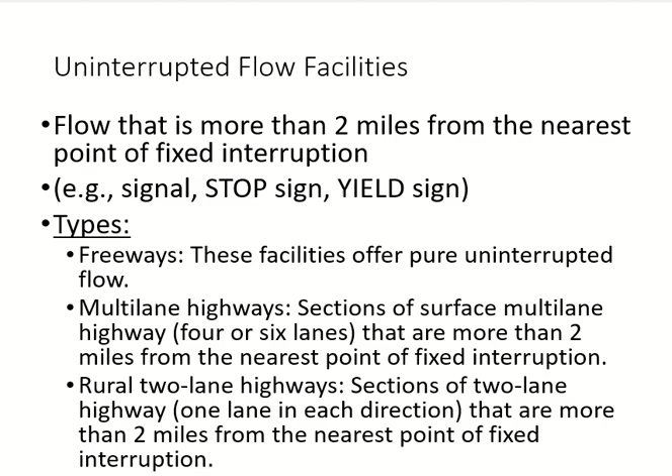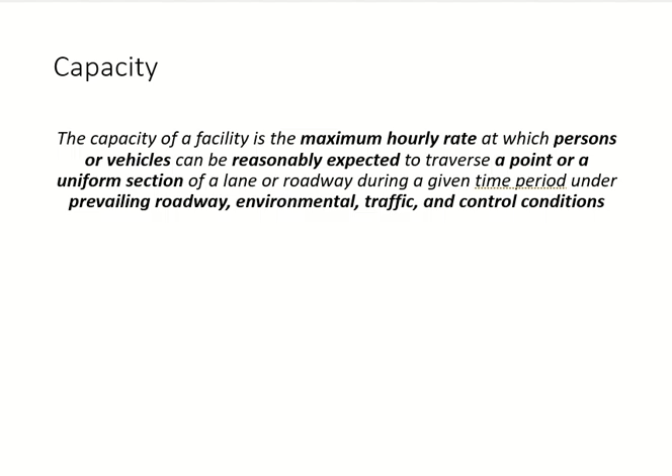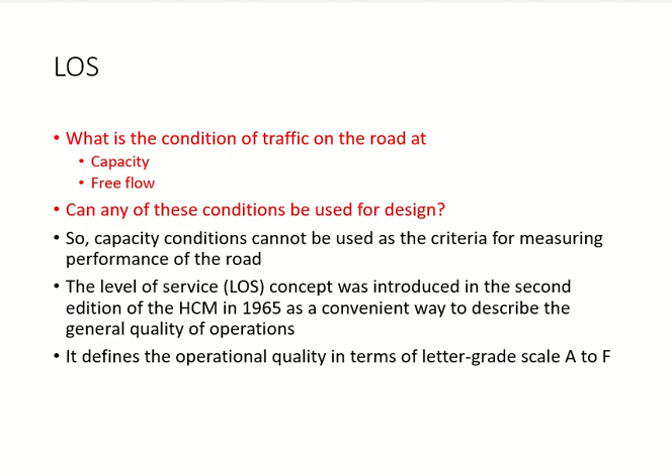Then the manual which we follow for this process, the definitions of capacity which is given by the manual, so it is more detailed, and it mentions what are the things which can change the capacity, ideal values of capacity, why do we need the concept of level of service, the definition of level of service, and the levels of service. Okay, so how many we have?

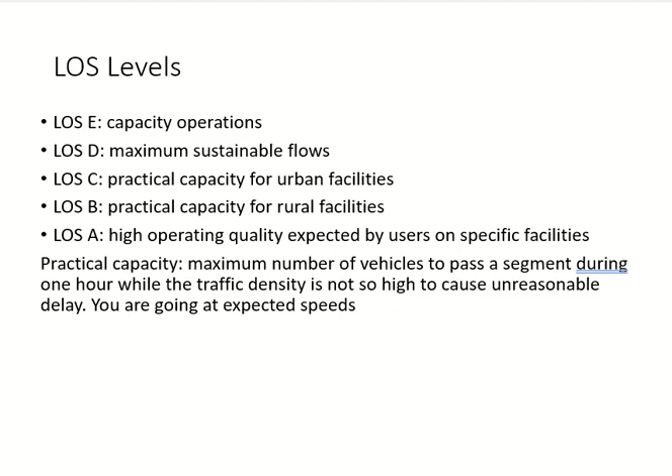5, because they are 5, right? We have 6, right? We have the 6th one, which I will give it to you, no problem. No F? Anyways. Okay, so today I'm going to start with this thing. So the level of service goes from A to F, right? Just like your grades. Sorry? No E. I thought no A. A, B, C, D, F.

Okay. But for example, if I say he got an A, I must have calculated that A using some number, right? Must have a number, and that number will tell me he should get an A, he should get an F, something like this, right? Okay, so that number is called a service measure. Service measure is a traffic parameter which tells you how much should be the level of service.

So in many cases we don't just assign it. We have to calculate something, and that thing will give us a level of service, and that thing is called a service measure. What we will study now, uninterrupted flow facilities, right? So for most of the uninterrupted flow facilities, we use density as our service measure. So if somebody asks me for a level of service for multi-lane highways or freeways, I will do it using density. To calculate level of service, I need density. Got it?

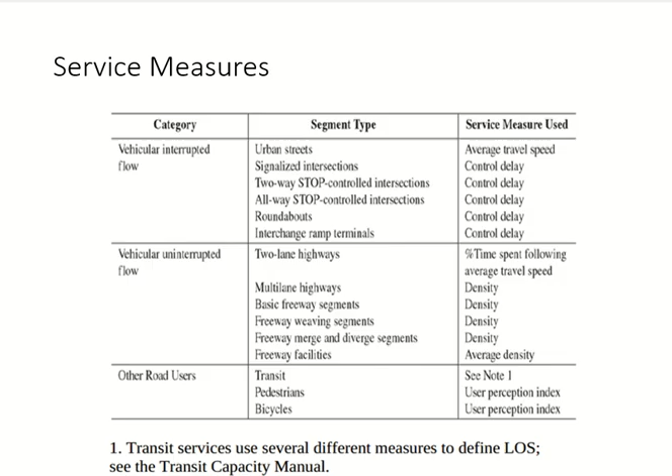Level of service changes according to traffic on the road. Agreed? So it goes from A to F. Traffic increases, where will the level of service go? If it is B, let's say. If traffic increases, will it go to A or C? C, right? Okay, this makes sense.

Now, traffic is a number, right? Traffic is a number, and level of service is a letter. So I need a value at which I will change the letter. Going back to the example of the grade. At what point do you go from A to A minus? 3.67. No, the number, the grade. Below 90?

Okay, so this is a number, right? There's a limit. Up to this limit, or more than this limit, it's all A, right? When you reach this limit, anything below that is A minus. Got it? Okay, so this limit for level of service is called the service flow rate. Service flow rate is the limit of traffic at which the level of service changes.

So at every level of service I have a range of flow rate. If you are within this range, your level of service will not change. When you get to the edge, it will change. For example, let's say the service flow rate for A is 1000. So from 0 to 1000, your level of service will not change. It will remain what? A. Now you cross 1000, it will start changing. Got it? So that limit of 1000 is what we call a service flow rate. Clear, everybody?

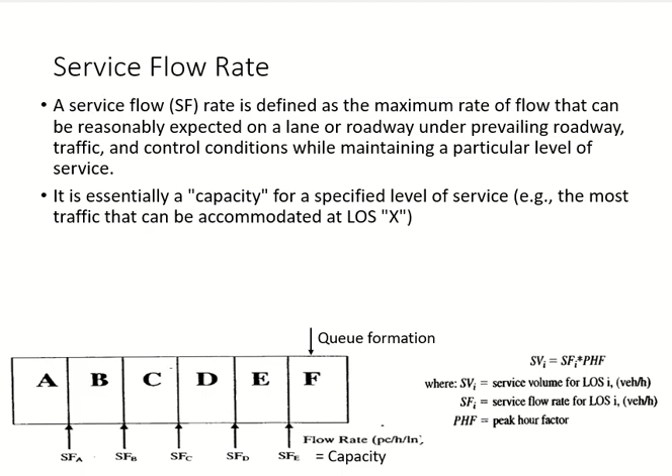In these slides, we will talk about 2 types of uninterrupted flow facilities, freeways and multi-lane highways. So we need to define them. Freeways are those highways which are purely uninterrupted. They do not have any intersections. In Bahrain, they call them motorways; the UK terminology is motorways. So a highway which has no intersections, basically. Another feature of a freeway is it always has a median. You will not find an undivided freeway.

Freeways always have more than 1 lane in each direction, so the total is always more than 2. So what are the 3 things I told you about freeways? There's always a median, more than 1 lane in each direction, and no intersection. No intersection means they don't have any at-grade intersection. There is another thing which we call interchanges. The ramps, the bridges and tunnels, they are there. They will not make the flow interrupted; it will remain uninterrupted.

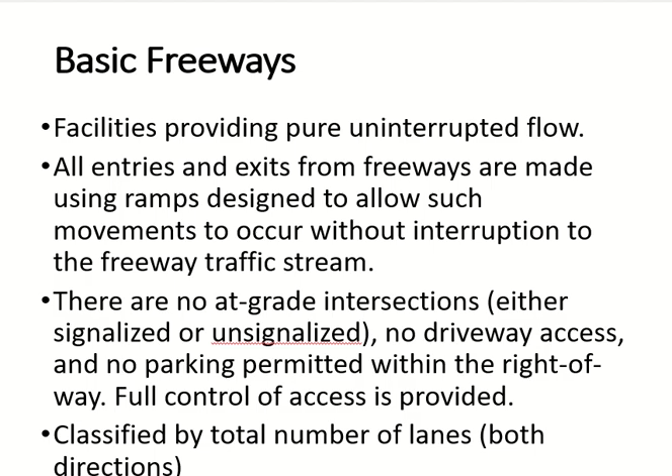So freeways, because they have so many parameters fixed, the only thing which makes most of the changes in the design is the number of lanes. So when you say freeway, you will tell me how many lanes you have. Then we have multi-lane highways. They are not purely uninterrupted, they have intersections. So there are parts of multi-lane highways which are uninterrupted. Which parts? Distance more than 2 miles. Yes. If the distance between two intersections on a multi-lane highway is more than 2 miles, then that part becomes uninterrupted.

Multi-lane highways means the total number of lanes is more than 2, because if it's 2 lanes, then we call it a 2-lane highway. And they may or may not have a median. So what are the differences between freeways and multi-lane highways? Median, and it's not purely uninterrupted. We are looking for the distance. Distance more than 2 miles, we say it is uninterrupted. When the intersection comes, it becomes interrupted at that point. So the whole highway is not uninterrupted.

Clear? And what is the similarity between freeway and multi-lane highway? What is common? Multi-lane. Both of them are multi-lane.

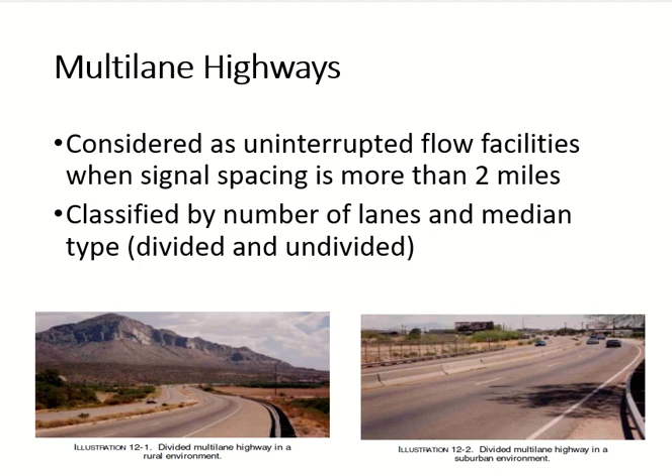Why are we discussing them together? Because their procedure is the same. Both of them need the same parameters, and in most of the cases they are using the same equations and the graphs. Okay. In both cases, you start your calculation with the free flow speed.

Okay. Free flow speed is a speed when the traffic flow is almost none, right? So the first thing which you need for both of them is the free flow speed. Okay, you will need it for others as well, but the rest of the procedure is also the same for them.

Okay, so now they have defined, and actually we have seen this limit somewhere else as well. Where? They are saying free flow speed is a speed when your flow is less than 1000 vehicles per hour per lane. Where did we see this limit? Spot speed. Okay, easy, right? The only chapter we did on speed. So spot speed, same, because spot speed is done for finding out the free flow speed. Okay, clear?

Yeah, for both of them, for multi-lane highways and freeways, we are doing the calculations according to a speed flow curve. Okay, I showed you the curves, right? The ideal curves earlier. I'll show you another one which is more practical and which is given in the manual. But the same curve is used for multi-lane highways and freeways.

There are some base conditions, meaning ideal conditions. Okay, when you start the analysis, you need to keep these conditions in your mind. Anything which is not ideal, you will make an adjustment for it. Got it? Okay, if it's the ideal condition, no adjustment is required. Clear? So we will make many adjustments later on. You will see them. Okay, but we are starting with this.

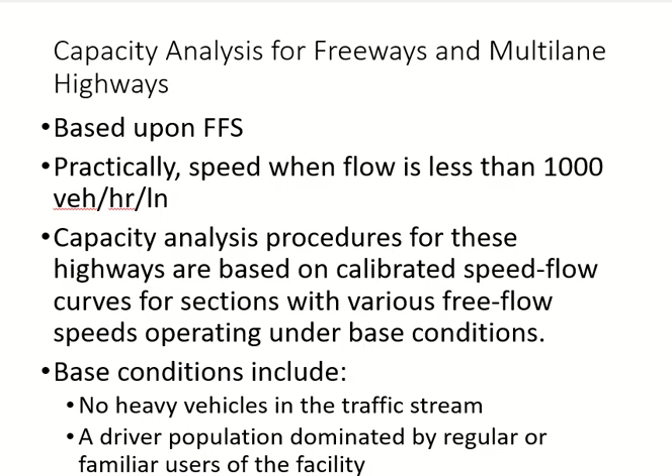So if drivers are familiar, their lane changes are less, their speed is usually higher, they go with less spacing, and so on and so forth, and they become very confident, right? So confident they feel they can do anything, right? So these are two base conditions for traffic flow.

This is the description for each level of service. Okay, you can read the points later on. I will tell you the most important things here. First of all, level of service A means free flow. Okay, when we go from A to E, the most important element which you will see changing is average spacing. This is the highest average spacing, and as you go down, the spacing will get less. Okay, and this is again for multi-lane highways and freeways.

Got it? Okay. So free flow means you are choosing your speed. The other cars are so far from you, your speed does not have any impact. Okay, and why are you so confident about your speed? Because you see a lot of space around you which is empty. Okay, so the other lanes are empty, you have a lot of distance in front of you, and so on and so forth. Clear?

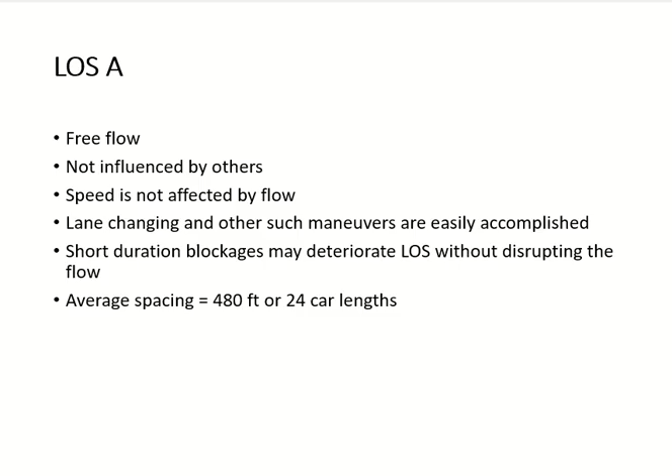So that means what? If, for example, somebody has an accident in front of me, only one car, okay, or a car has a problem, it's stopped, I can easily go to the other lane and continue in this condition. Clear? Level of service B is still free flow, but the spacing is a little bit less.

Okay, so you are still going at high speed, but your level of caution is increased. Okay, now you start to feel the presence of other drivers. Now you start to feel that I should be more careful. We are just feeling it, not doing anything.

Got it? Okay, we are just feeling it. Yeah, they are drivers. Got it?

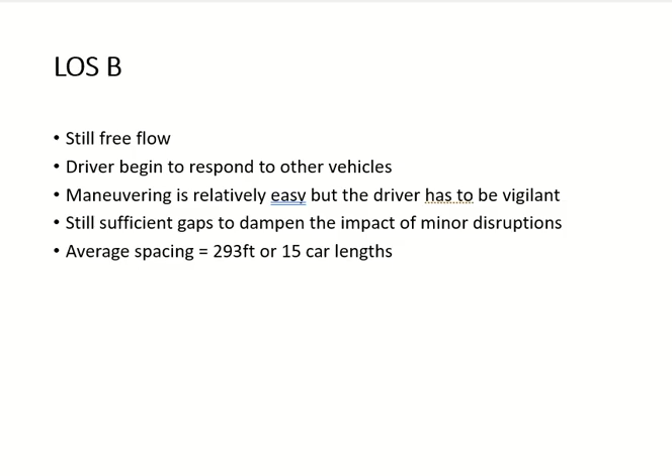So the spacing is decreased, and why do we have this? We see the spacing. The feeling of care is because of the spacing, but the spaces are still enough. I have still enough gaps in my lane and the other lanes that I feel confident. If something happens, I can easily go to the other lane and continue. So this is why we are still going at free flow. Level of service C is still free flow, but your maneuverability is less now, restricted by other drivers.

So if I am going in my lane, I can go at very high speed, no problem. But if I decide to change my lane, then I may have to wait for a gap. If I still have a gap, okay, but the frequency of the gaps is less now. Got it? There is still a gap, but it's not like whenever I want to change my lane or slow down, I will find a gap.

You can see the speed is going down, and since the frequency of the gaps is less, if somebody stops in my lane, it may cause a traffic disruption because I don't have the chance to go in the other lane. Or maybe I will have the chance, but the driver behind me will not get the chance. So what they will do, they will stop. So from level of service C, you have the risk of disruption. In the other two levels, the disruption risk was very, very low because of the frequency of the gaps.

Got it? Clear? Yes. What's the number of cars?

15 cars, and this is spacing converted to car lengths. So 203 feet basically equals 10 car lengths, almost. Each car is around 18-20 feet. You may say, no, my car is bigger. Good for you, okay, but not according to them. So this is spacing converted to car lengths.

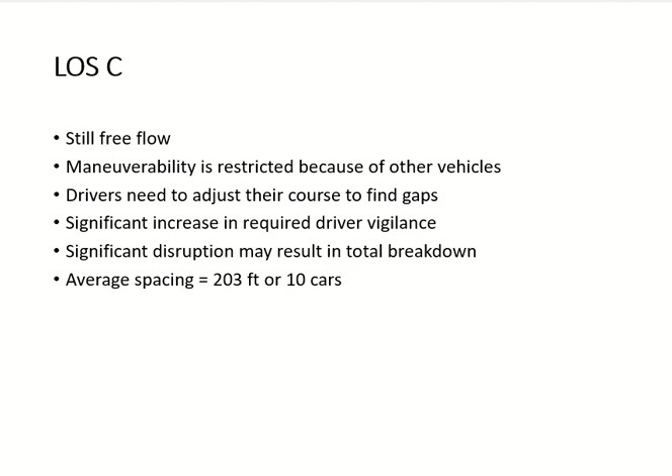Spacing is also related to density, right? It's an inverse relationship. So when spacing increases, density decreases. When spacing decreases, density increases, and that has an impact on speed as well. Now, because the spacing is less, the gaps are less, and their frequency is also less. So the chance of disruption is even higher now.

In the earlier case, there was a chance - I want to change my lane, I may find the gap easily. But in this case, you will not find it. So even a minor disruption can cause a full traffic jam, because now there are not too many gaps available.

So if there's a stoppage, the drivers will form a queue because all of them cannot move to the other lane at the same time. So the chance of disruptions are higher even with a minor blockage. Maybe the other car did not even stop completely - it just slowed down, it has a tire burst or whatever, so it just slowed down and it's going to the shoulder. Even that can cause a queue.

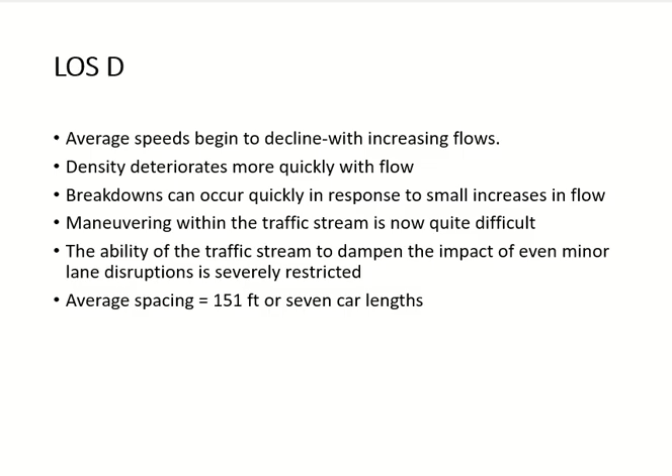And then we have level of service E. Level of service E represents what condition? Capacity. Capacity means full saturation, right? Full saturation. So where are the gaps now? No gaps. Does it make sense? Yes, for you guys, yes.

Traffic flow without any gaps. Does it make sense? Now you're just saying it because I said it. You don't mind, huh? Without gaps, no problem, who needs the gaps? Let me go over this car. There are no usable gaps. There is a gap, obviously, there is a gap - between two cars there will always be a gap.

So there are no usable gaps, meaning gaps which you can use for your maneuvers, gaps which you can use to go into the other lane, slow down, or go to the shoulder. In a moving traffic stream, this gap is not enough to make these maneuvers.

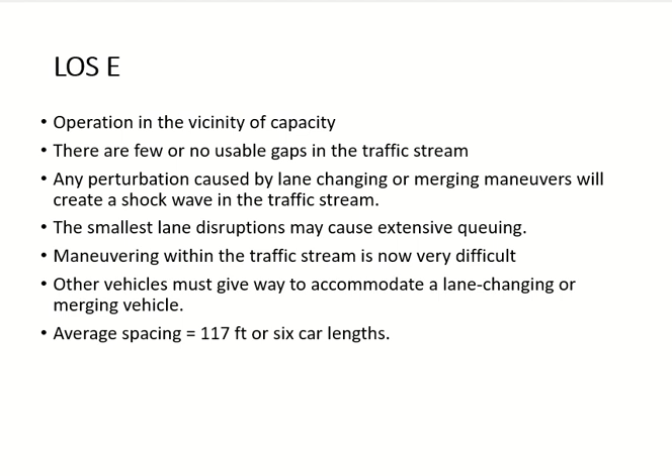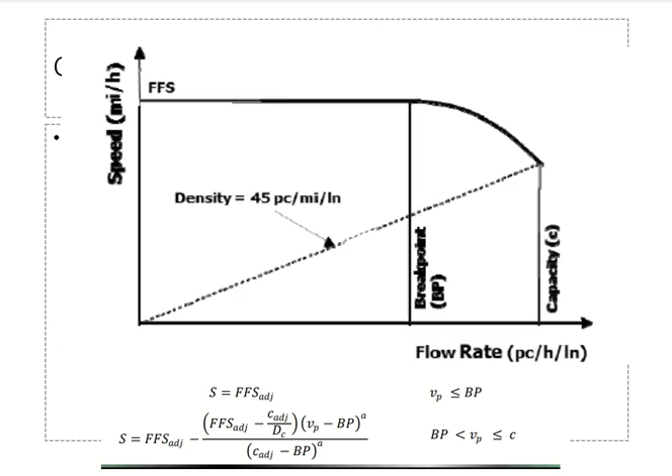And then you saw in the equation there was a parameter A. So they have already found A using some field studies. There is no equation for A. If it is freeway, it's 2. If it is Multilane highway, 1.31. Clear? Okay.

So the only thing remaining here are these factors, SAF and CAF. I will come back to them. But you know the parameters now: free flow speed, capacity, break point, and the A value, which we required for the previous equation.

These are speed flow curves for freeways, for specific freeways. You will make one of these curves for your term project for your highway. So your curve should look like this, with one line, obviously one curve, not one line.

Okay, don't get overexcited, I'll make 5 curves. You cannot, it's one highway. These 5 or 6 are for 5 or 6 highways. You have one highway, so you will have one curve.

Okay, and then you see the lines, right? You see the lines in them. Each line is representing what? No, each line, not the curve. Level of service, right? Density or the level of service. So you will have all these lines.

Clear? I'm just going to explain the curve. How to make the curve, I will explain in another example. Now I'm just going to explain the curve. So we already know, on the y-axis speed, on the x-axis flow rate. Each curve represents a different free flow speed, meaning it is for a different highway.

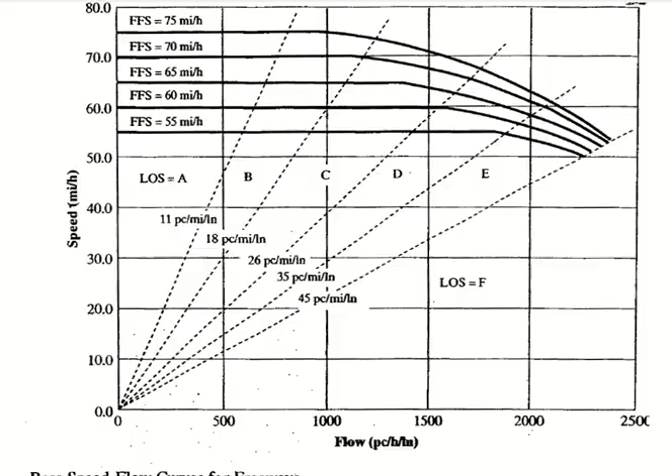These are the ranges of density I was talking about. For each level of service, the range of density is given. Clear? Okay, just have to be careful with the equal to. So A goes from 0 to 11, but if it is 11, it cannot be B. B is more than 11. Got it?

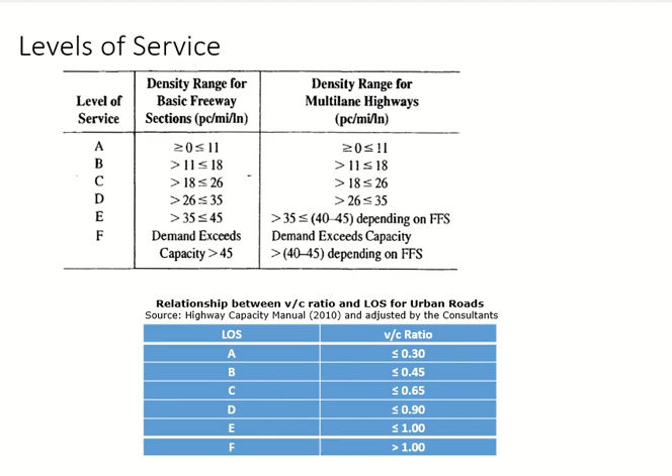In Highway Capacity Manual 2010, and this is what they are using in the ministry and the other companies as well, they converted the density using the flow rate and the capacity into V by C ratio, volume upon capacity ratio. So now you have two methods to find out the level of service: one is using the density range from highway capacity manual, and the other one is using the V by C ratio. This is more practical, this is what they use, because capacity of the highway they already know from their design, and volume they can go and observe. So volume upon capacity ratio is very easy. Got it? Clear or not? Any questions?

I talked about service flow rates earlier. What is service flow rate? What was service flow rate? A limit for what? To change between the levels of service. Okay, now I go back to this graph.

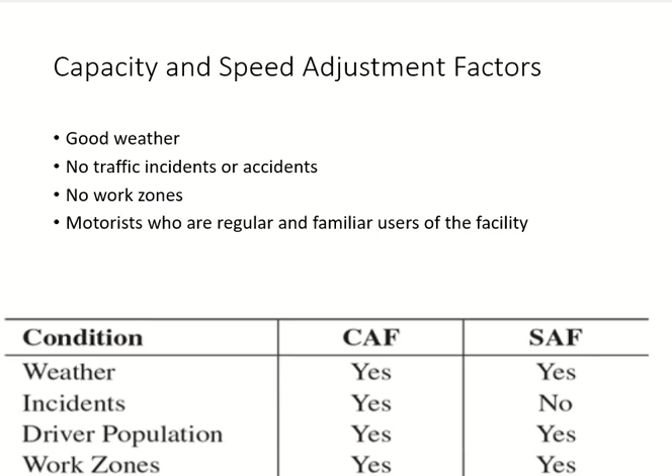Now this table gives you a summary of what adjustment factors will apply where. You can see all 4 adjustment factors apply to capacity. So if any of these conditions is not met, an adjustment factor will be applied to capacity. But for the speed, only 3 apply - you can see a no here. Which one is that? Incident. So if there is an incident on the road and all the other conditions are met, I will not apply any adjustment factor to speed. So if there is an incident on the road, it does not need any adjustment factor for the speed. Now from where do I get the adjustment factors?

I'll come back to it. Okay, this is the table which gives you adjustment factor for weather on capacity. So what type of weather you have? How do I know I have this type of weather? There is a value, right? You cannot call anything heavy rain. No, there is a value. So we have the weather, we have the value to define it, and then we have the adjustment factor, and we need the free flow speed as well.

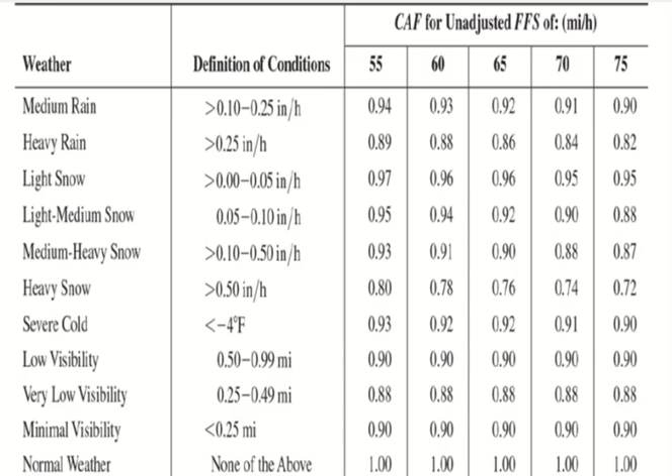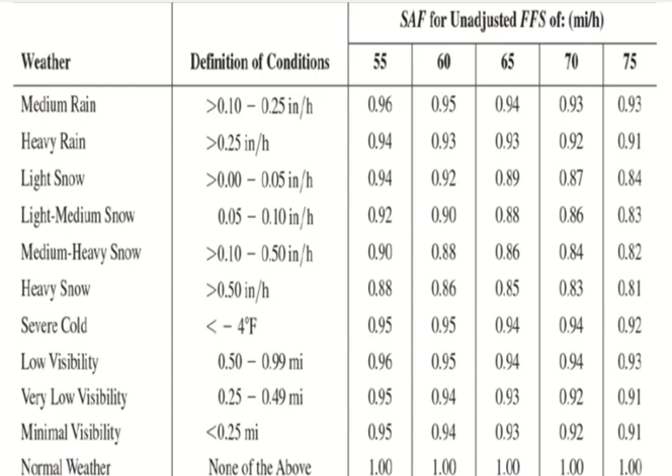So this table gives you adjustment factor for capacity because of weather, and this table gives you adjustment factor for speed because of weather. Same things, you need the same things. You need the weather condition and you need the free flow speed. Okay? Clear?

happy times, right? We can put food trucks there, we can have a picnic there. No need to get into these calculations and destroy our life. Okay, have fun. You will do it on 16, right? 16 December, right?

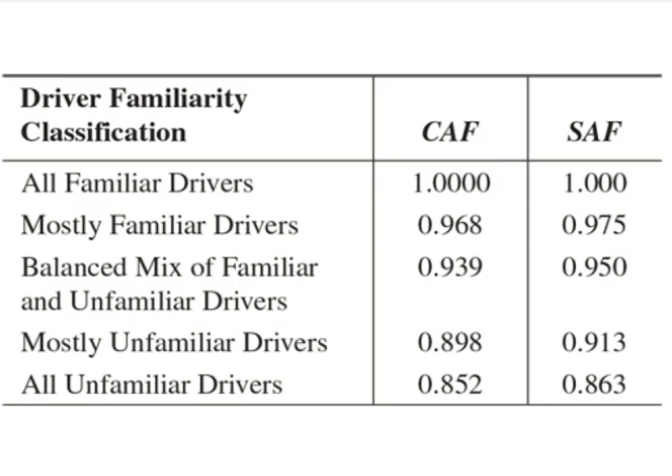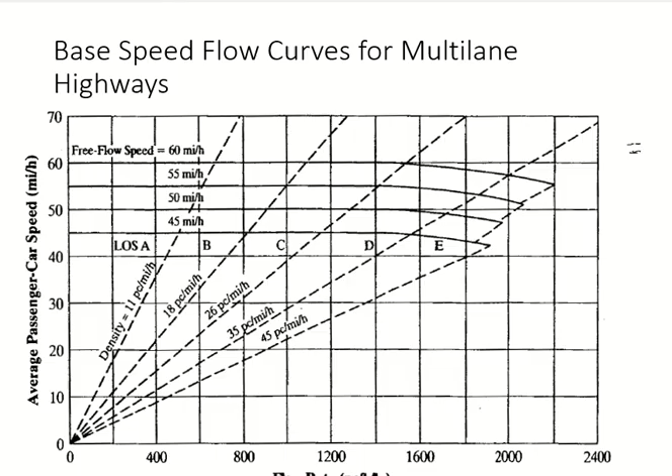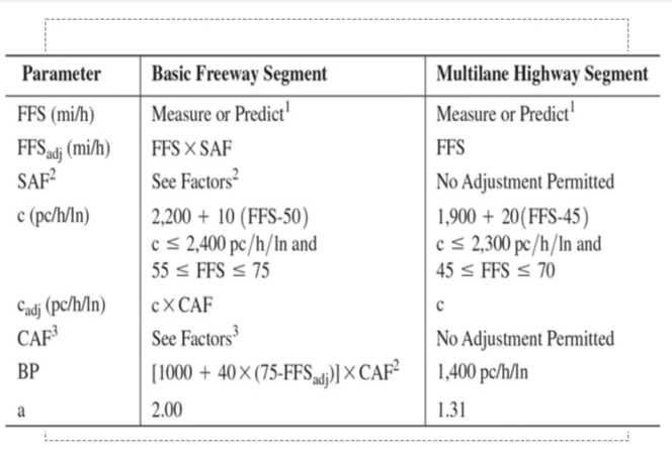Before I move on to the 4th factor, which will need some calculation, let me come back to this slide. In the end, how many speed adjustment factors you see? 1. How many capacity adjustment factors you see? 1, right? But how many conditions we discussed? 4. So there could be heavy rain and unfamiliar drivers. So I will have how many adjustment factors? 2. I need to combine them, right?

How do we combine them? You multiply. So if you have 2, you multiply 2, it will become 1. If you have 3, you multiply 3, it will become 1. If you have 4, you multiply 4, it will become 1. If you have multiple factors, you multiply them. So the factor which you are multiplying in those equations is the product. Got it? Clear?

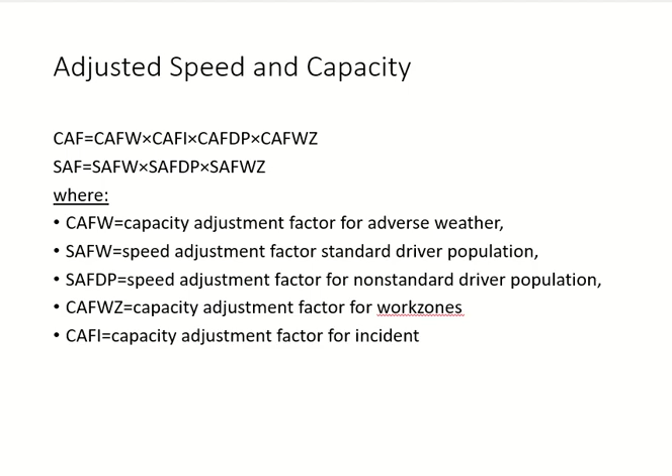Now the only factor left is the factor for work zone. What do we mean by work zone? Construction or maintenance activity happening on the road or beside it. This needs some calculations; there is no table for that. So we will follow a sequence. The first thing we need to calculate is capacity of the work zone. How do we calculate it? You see the equation over there.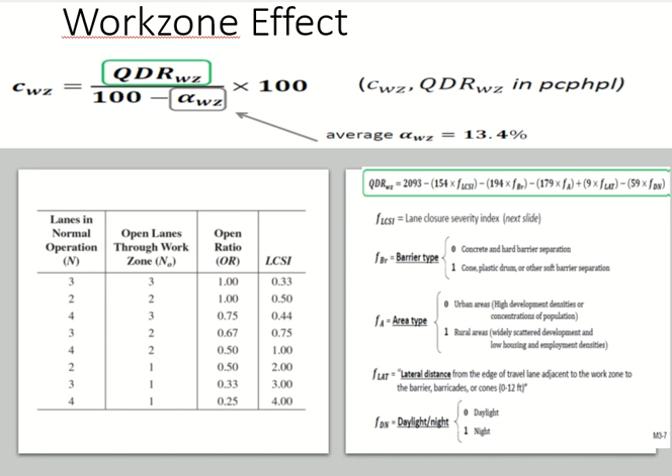Then alpha we know, 13.4, or you calculate your own value; there are methods given in the book. Using this equation, you will have the capacity of the work zone. Now we are doing it to find out the adjustment factor. The adjustment factor for the work zone will be capacity of the work zone from this equation divided by normal capacity. This will give you the adjustment factor of the work zone for capacity.

Clear? Do we know how to calculate the normal capacity? Do we know it? Speed and density. Very good. Any other bright ideas? We don't know, right? So if this comes in the exam, you get 0. Right or wrong? So this will come in the exam. Unless you think, wow, how do you calculate it?

Okay. Then we have the free flow speed of the work zone. It's in the same slides, for God's sake. Like, what is your memory? The adjustment factor for free flow speed. So we need to calculate the free flow speed for the work zone. Again, we have a long equation.

This is called the speed ratio. FSR is the speed ratio. What is FSR? Given somewhere. Yeah. Speed limit normal upon speed limit of the work zone. So FSR is this ratio: normal speed limit upon speed limit of the work zone.

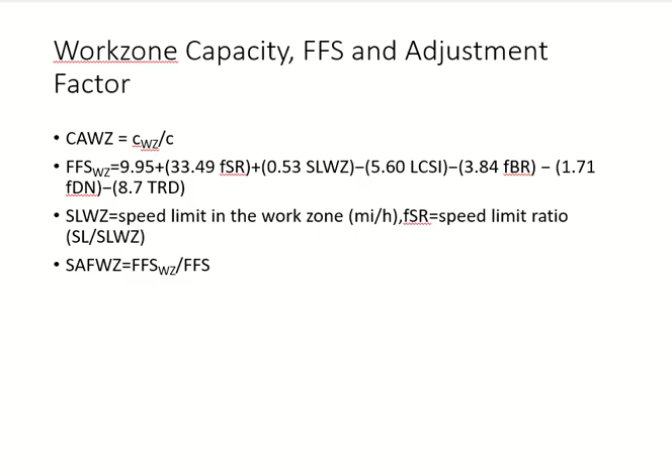If you read, we are doing it for what? Adjustment for what? Oh, sorry, before that, once you find out the free flow speed of the work zone, the speed adjustment factor will be free flow speed of the work zone divided by normal free flow speed. Okay, so the adjustment factor is basically the value of the work zone divided by normal value. If you are doing it for capacity, work zone capacity divided by normal value. If you are doing it for speed, work zone speed divided by normal speed. Got it? Okay.

Now, in this example, you see we have a freeway which is undergoing some maintenance work. The point which I want to make here, which is about all the adjustment factors, is it's a long-term work zone. So adjustment factors are not applied for temporary conditions, for short-term conditions. For example, weather. So we have, for example, heavy rain. I will not apply that adjustment factor, because that factor will apply to maybe out of the whole year 1 hour.

Okay, what are the chances of having heavy rain throughout the year, right? Nothing. But if I am doing it for a tropical country like Malaysia, Indonesia, they have more frequent rain, right? So there they will consider the factor for weather. Got it? Clear? Same thing for the work zone as well. The work zone is about like some maintenance work, new carpeting, which will be finished in 2 days. Fine. It's an exception. You just ignore it.

But if it is a big project, like a bridge construction, which will continue for 2 years maybe, then you have to consider, because 2 years is a long period, it will impact the whole year, right? The construction will impact the whole year. Then you need to apply the adjustment.